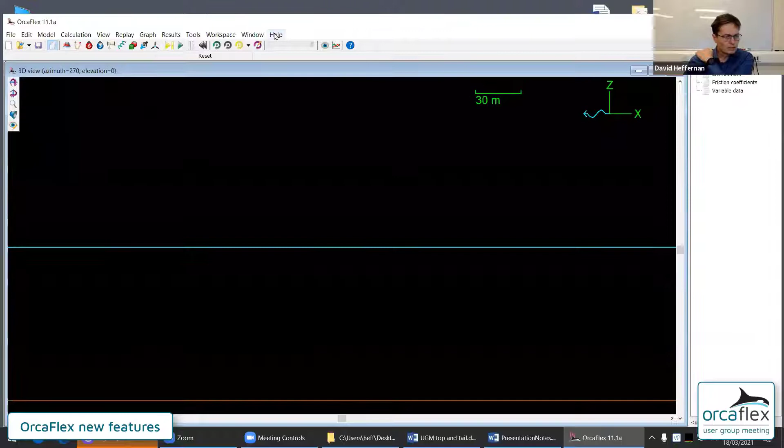As I always do, I point out the documentation can be found for each release under Help, What's New, and we have the lists of new features with hyperlinks through to the details of the change. So I'll just be giving a high-level overview. If you need to learn more about any of these new features, come to the documentation, go to What's New, and follow the appropriate link.

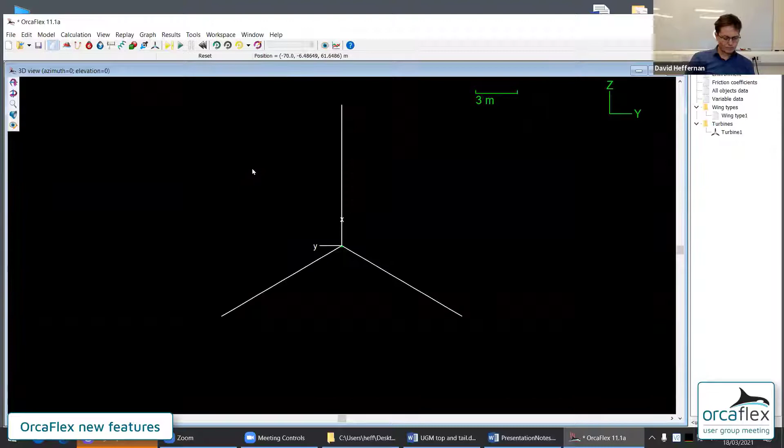So I'm going to be flitting through from one feature to the next. To begin with, I'm going to talk about turbines. I've just dropped one on the form, and I'm going to show node axes, and I'm just going to put a few more segments in there.

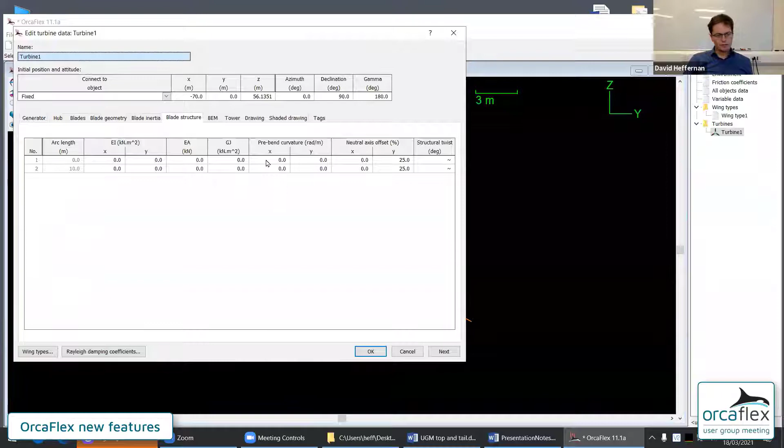So the change that I want to talk about is prebend, which is something that you can now specify for a turbine, on the structure page of the data form, and I will keep doing this - I'll try and get both my turbine and the data form on screen. I can put in a value.

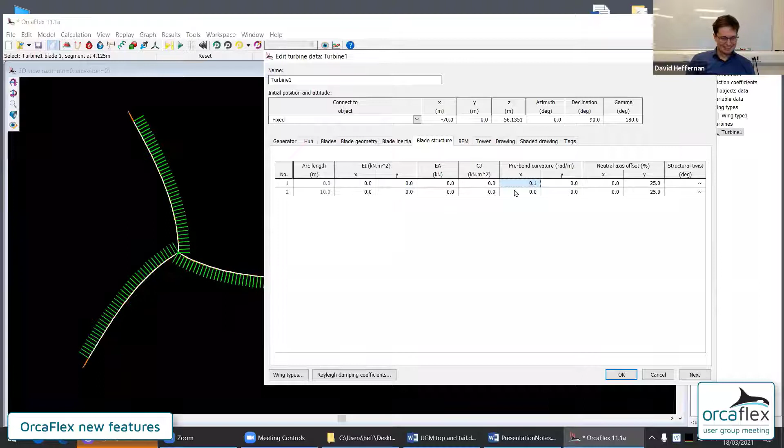I can do really crazy things like that, which, realistically, it's going to be smaller, isn't it? And curvature in prebend curvature in X and Y - I've obviously grossly over-specified these curvature values just to demonstrate it. So on the face of it, it's a very, very simple feature.

The data is certainly simple to enter, even if it might sometimes be tricky to get hold of the actual numbers. It's a feature that matches something you can already do with OrcaFlex lines, which are very similar to turbine blades. But it's actually an important feature, even if it looks like quite a small change. The prebend can have a pretty significant impact on turbine response, so being able to model it now is important.

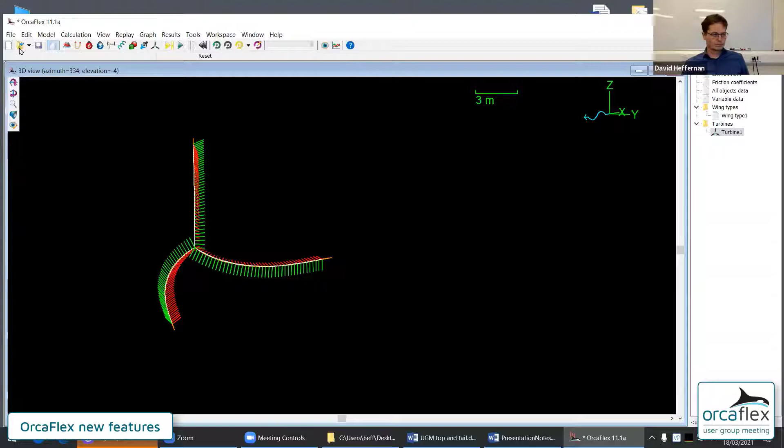Let me have a look now at a pre-prepared example.

And I'm going to show range graphs for turbine blades. Now, range graphs are an existing feature. Previously, you could only have them for lines, but turbine blades are very similar to lines. And a range graph plots how a variable varies across the arc length of a line, or now in the case of a turbine blade, a blade.

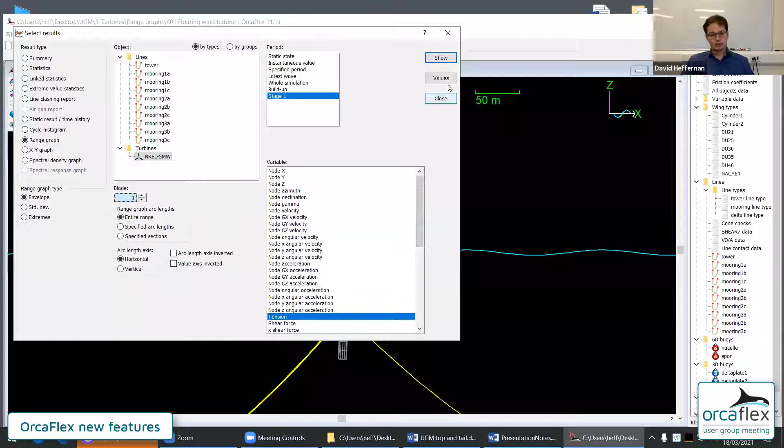So I've selected the turbine here. I'm going to look at results for tension and bend moment for blade number 1. You can specify whichever blade you want, and obviously you just get the results that are defined for blades rather than the whole turbine itself. And it takes a little while to extract the results, and here we have range graphs for turbine blades.

Now, previously this information was available. You could get time histories and do min and max at a particular arc length, but what you couldn't do is this nice plotting of the whole thing across the whole blade.

And the final thing to mention about turbines, we've done a bit of work on our examples. We added a new turbine example which is available on our website. And this includes a model of the NREL 15 megawatt reference turbine, particularly notable because it uses the NREL reference open source controller ROSCO. That example had a fixed foundation, a fixed bottom,

but we are in the process of slightly reorganizing our examples. So the fixed platform will be changed from the 15 megawatt to a 10 megawatt, and we'll add a new example with a floating platform for the 15 megawatt turbine. We think that's maybe a little bit more representative and a little bit more useful. So keep an eye out for that coming to our website fairly soon.

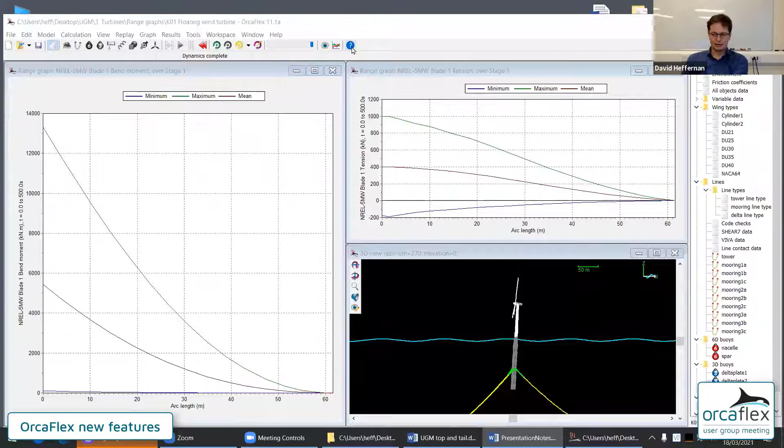And you can get the turbine controller examples from our website if you search for that phrase, OrcaFlex turbine controller examples, and I'm sure you'll be able to find that. But you can actually even pull them out of the help file. They're actually embedded in the help file. So if I go to a guide to using Python external functions, I click on that and I get to download a zip file with all these examples in, in case you didn't know where to find it.

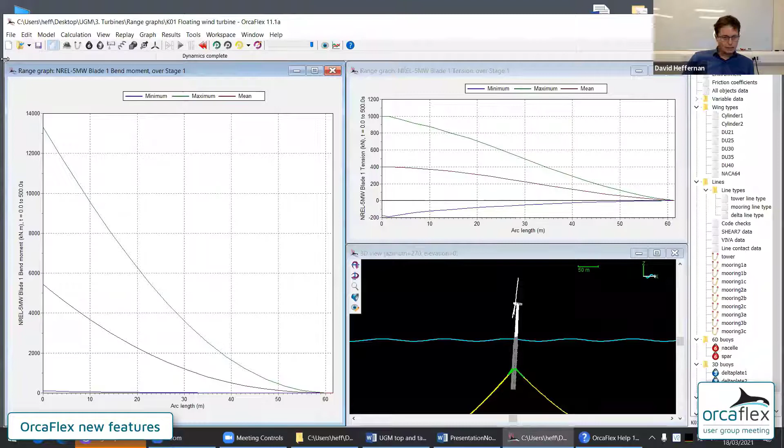Okay, I'm now going to leave turbines behind and talk about lines. They've not had that many changes because lines are a pretty mature object in OrcaFlex. I'm going to look at bending stiffness, and bending stiffness has a variety of ways in which it can be specified. It can be specified as a linear value, or using the variable data option, I'm not going to put any values in here, but you can define it as a non-linear function, a bend moment against curvature. That non-linear function can be elastic or hysteretic. And you can even define bend stiffness as being specified by an external function.

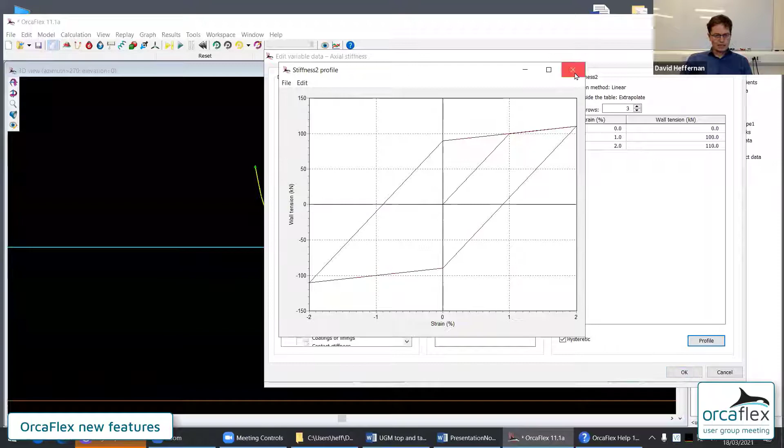For axial stiffness and for torsional stiffness, previously you had similar options, but you only had linear or non-linear elastic. Well, now both of them can specify the stiffness as an external function, so that's new. And additionally, if you're specifying it with a non-linear table, you can opt for that table to be interpreted in a hysteretic way. Select hysteretic, and we're gonna model it using our classic hysteresis model. I won't demonstrate it now, but that is also available for torsional stiffness.

The other change that we have relates to contact diameter. If you notice now, there's both outer and inner diameter. Previously, there was just one contact diameter, and it was the outer contact diameter. If you leave these values at tilde, they pick up the values from the diameter value specified here, but you can override them if you want to use a different diameter for contact purposes.

Most of the contact models are contact at the outer surface, but for line contact, it is possible to have contact at the inner surface of a line. So because that's available, we had some users for whom it would be beneficial to be able to specify the inner contact diameter being different from the diameter specified here.

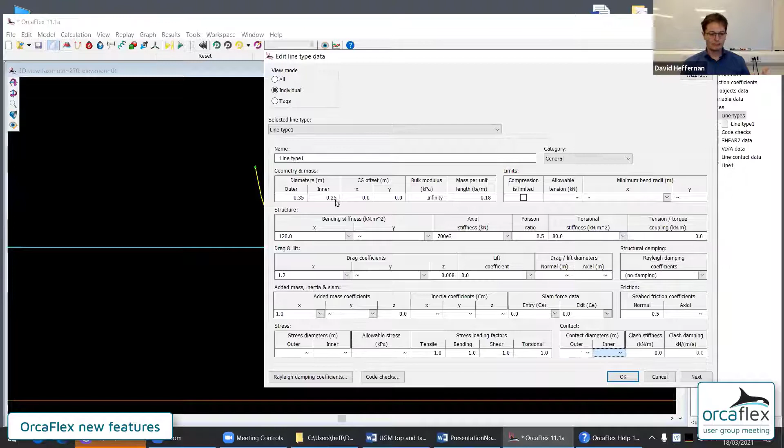We have added a couple of new result variables for lines. I'll just point them out in the documentation. You can find out the definitions by looking yourself. Sidewall pressure and total mean axial strain. And the final thing I want to mention is, I'm going to go back to OrcaFlex 11.0 for this.

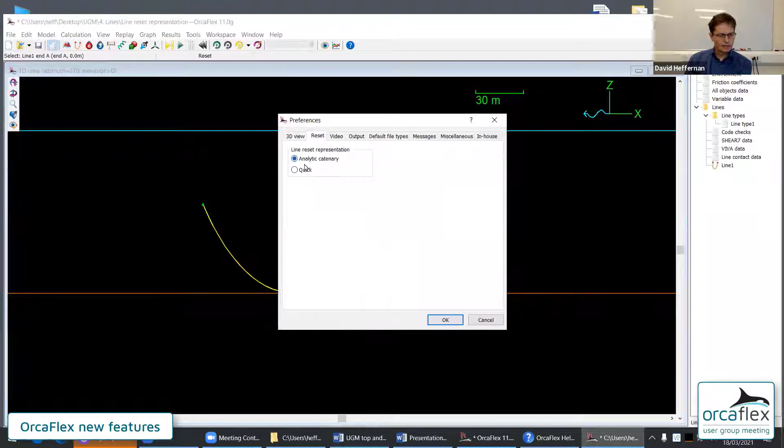Yeah. The last few releases, it's been possible to have the line reset representation accounting for the seabed using the analytic catenary solver in OrcaFlex. And in 11.0, there were two ways of working with this. You could either define a user preference, so that would allow different users to have a different preference, whether using the analytic catenary representation or whether they use the quick

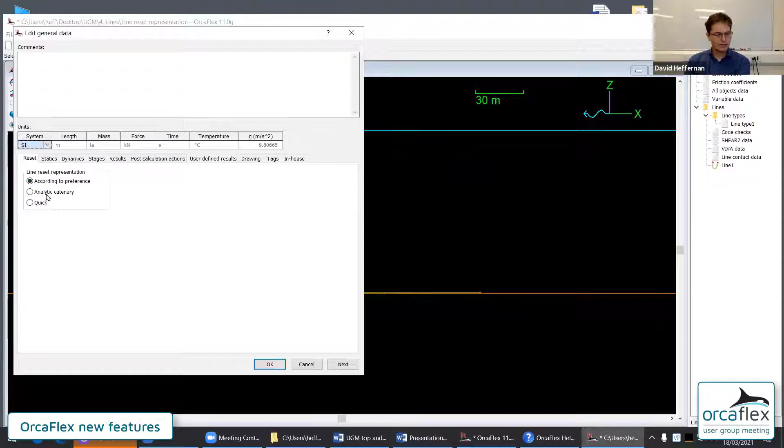representation, or as opposed to a per user setting, there is a per model setting that's built into the data file where you can choose to say this data file will always use quick or will always use analytic catenary. Alternatively, the default was let the user decide on an overall preference and apply that preference to any model which is set according to preference.

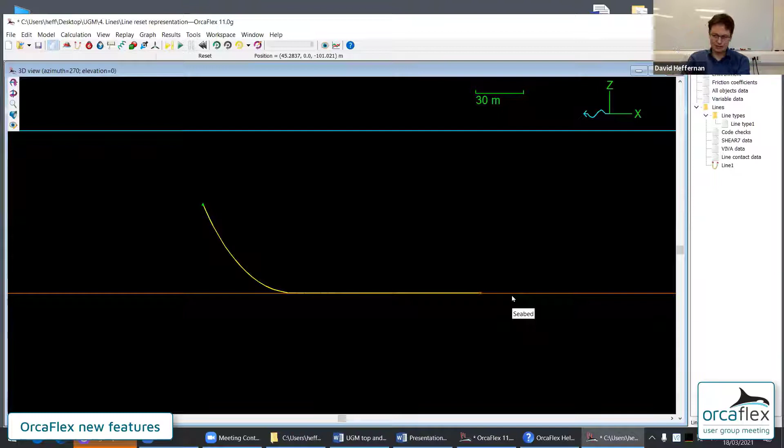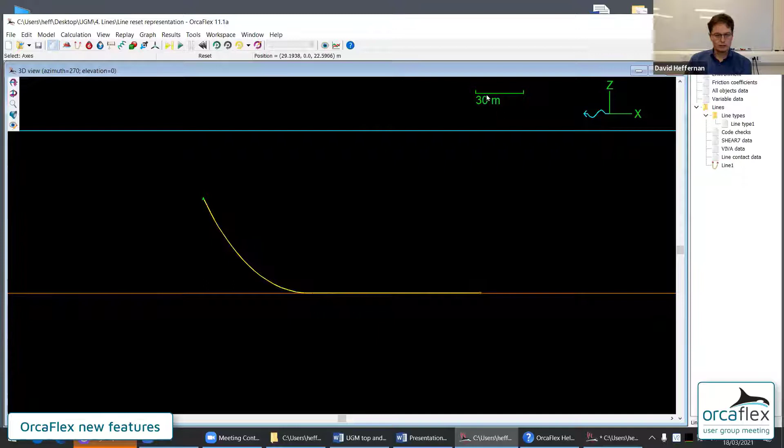Well, I won't explain why, because I tried to do that this morning and got myself tied in knots because it's quite convoluted. But for various reasons, we've decided to remove that preference. So now the setting, whether you represent the line in reset with analytic catenary or quick, cannot be controlled by user preference. It is always determined by the model data.

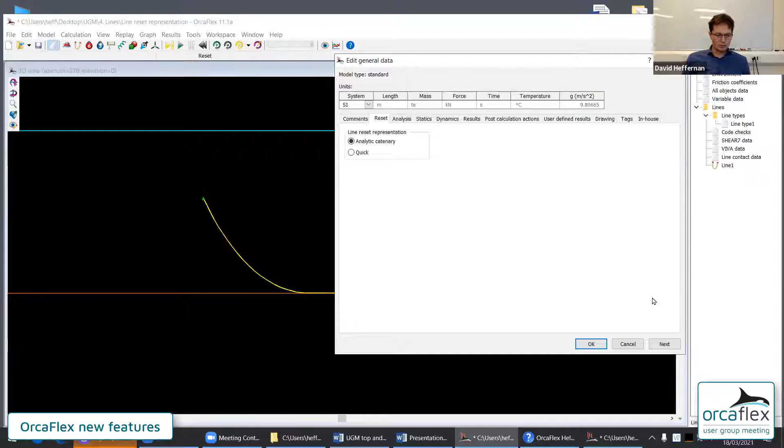Okay, so it's a slight loss of convenience. I'm not even sure how often that convenience was used, because I suspect most people just have it on analytic catenary the whole time and don't think about it. So I suspect nobody will really notice. But if any of you were reliant on that, I'm afraid the preference has gone. The functionality is still available, but the user preference mode has gone. But there were very good reasons for doing that.

Right. We'll look at vessels now. A couple of changes there. Again, they're quite a mature object, so there's not a whole lot that's different. So, frequency dependent added mass and damping. In previous versions, you specify the added mass and damping matrices at a range of periods or a range of frequencies depending on what convention you're using, and those were finite periods or frequencies.

But for the convolution integral, the program needs an infinite frequency added mass. Previously the program would estimate that using the data provided for finite frequencies. But diffraction packages are capable of calculating the infinite frequency added mass matrix, and OrcaWave does that, and a number of others do. Once OrcaWave was producing and outputting it, we felt it was a bit odd that we weren't using it in OrcaFlex. So you can now use that in OrcaFlex.

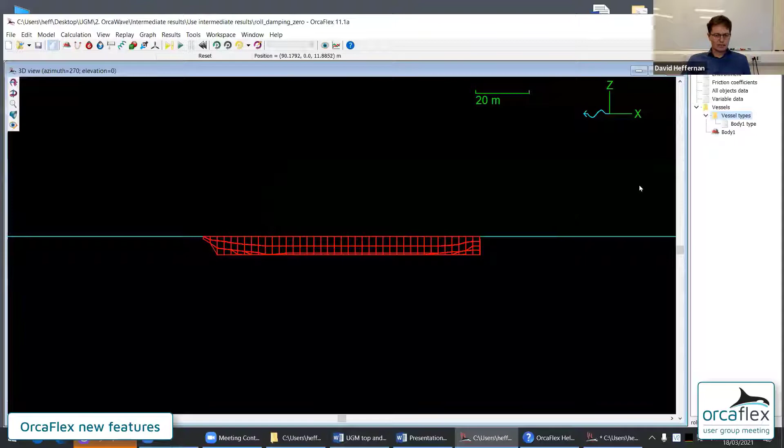It's pretty simple to see how it works. I'm going to import a model from yesterday's OrcaWave presentation, importing that OrcaWave results file into OrcaFlex itself. I've got hydrodynamic data calculated by OrcaWave, and we can see that we have an infinite frequency added mass matrix defined. And we will import that from other sources. If you're importing from WAMIT and the WAMIT output file has it, then it will come in to OrcaFlex. Likewise for generic text files.

At the moment, we can't import it from AQWA because, so far as we know, AQWA doesn't export that information. We may be wrong, but whenever we've asked for collaboration with AQWA on our import facility, we don't get any response. So users that are also AQWA users may be able to tell us that you can get this information out of an AQWA file. If that's the case, let us know and we'll see if we can bring it in. But otherwise, there are other programs, and certainly OrcaWave, which a lot of people are starting to use now, produces it, and we will import it.

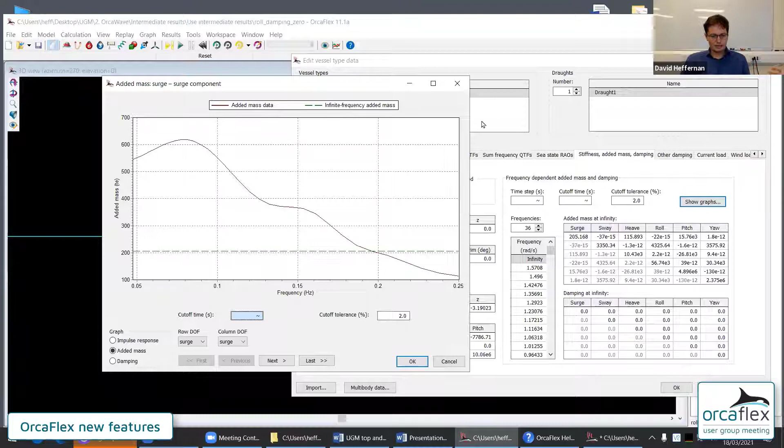And I also wanted to note that the previous method actually looks pretty reasonable. It depends on your data, but I'm going to show the graph of added mass here. The green dotted line is the infinite frequency. This has come directly from the data, so that value 205 corresponds to that value there. If I delete this, and you might have such data yourself, even in OrcaFlex 11.1, OrcaFlex will revert to estimating the infinite frequency value from the finite data.

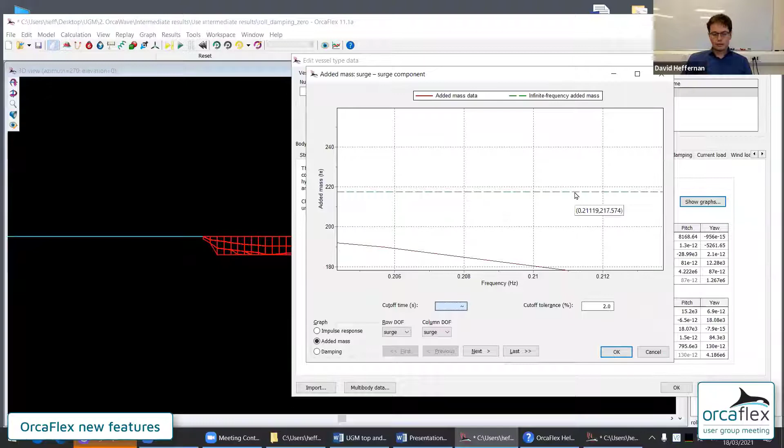And if I look at what that is, zoom in. Previously, the calculated value was 205. The estimated value is 217. It's a little bit out, but it's the same ballpark. So I don't think what was happening previously was too far off the mark, but I think it's an improvement to use the accurate calculated value if it's available.

The other change with vessels relates to the calculation options. This data is new in 11.1: the options of how you calculate hydrostatic stiffness angles. It is only used when the calculation mode is filtering. It's not a data item that you get offered when you're using QTF modifications.

But when you're using filtering, then you have to choose between orientation and subtraction. Subtraction was how the program did it previously. And what this controls is how OrcaFlex calculates the roll and pitch angles used as input to the hydrostatic stiffness load. And so long as the vessel type's datum trim angle is 0, then these two methods are equivalent. It doesn't matter which you choose.

But when that's not the case, when you have non-zero datum trim angle, then there is a difference. And for significantly non-zero datum trim, we believe that the orientation method is preferable. So, for any future models that you build, you should use orientation, which is the default. And we've retained subtraction just so that you can compare like for like and recapture previous calculations.

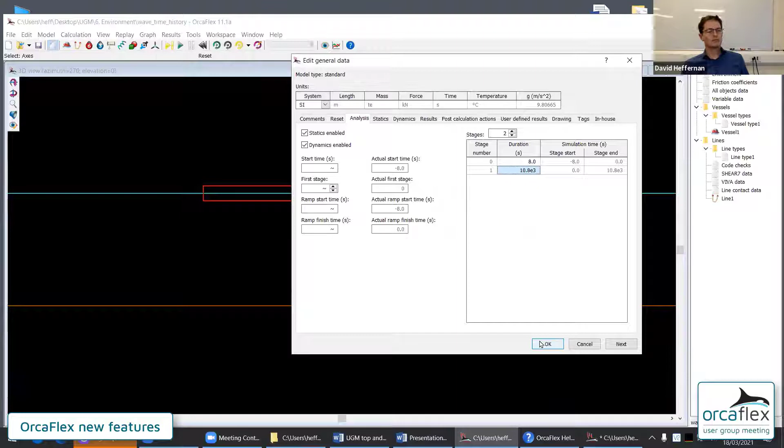And I'm going to look at a prepared example. I have a simulation duration of 10,800 seconds, which is 3 hours. And my wave data, it's a time history, with a 0.1 second time interval. It's all pretty routine stuff. If I run this and wait to see the first estimate of the time taken to run a 3-hour simulation, it's a pretty simple line. There's only 100 or so elements. It's not a big model, but it's going to take over a day to run this analysis.

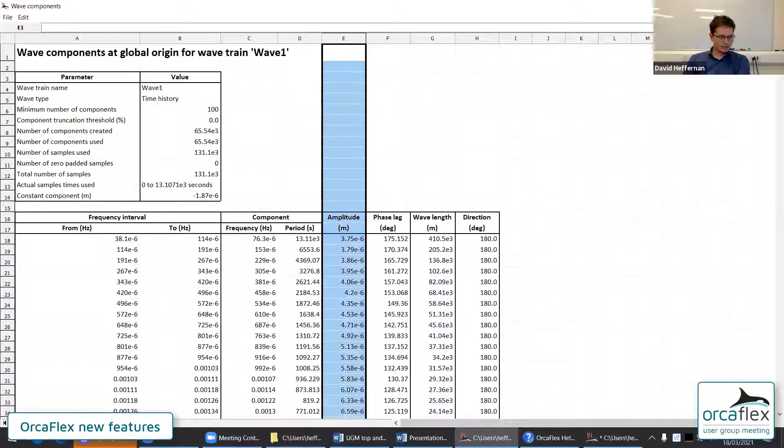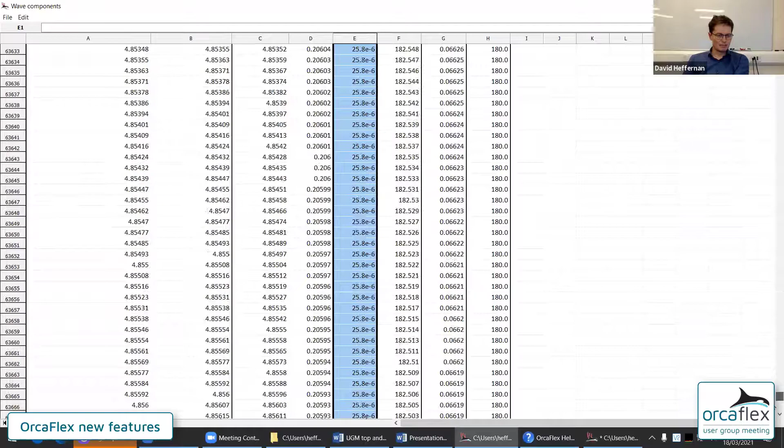And the reason is, if I come back into the environment form and look at the wave components, I see I'm dealing with 65,000 wave components. It's a lot of wave components. If I select the amplitude data, it's low to begin with. Fairly rapidly, as frequency increases, we get some significant values. And then again, the absolute lion's share of this table has very, very small amplitude. You can often neglect the majority of the components without losing any really important information. All those high frequency components are there to ensure that the wave goes through each data point exactly, but to get the overall sense of the wave, you don't need them.

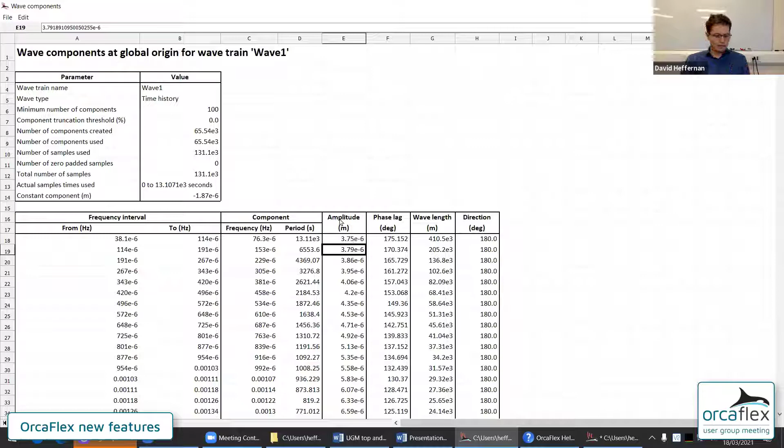So we've been suggesting you find some way of truncating, taking the first so many lowest frequency wave components, dropping them in as user specified components, and that's it. Gives a significant speed up. That's fiddly to do if you've got lots of different time histories. It can be awkward. So what you can now do in 11.1 is get the program to do that process of truncating the high frequency components for you, and you can control it by specifying a truncation threshold.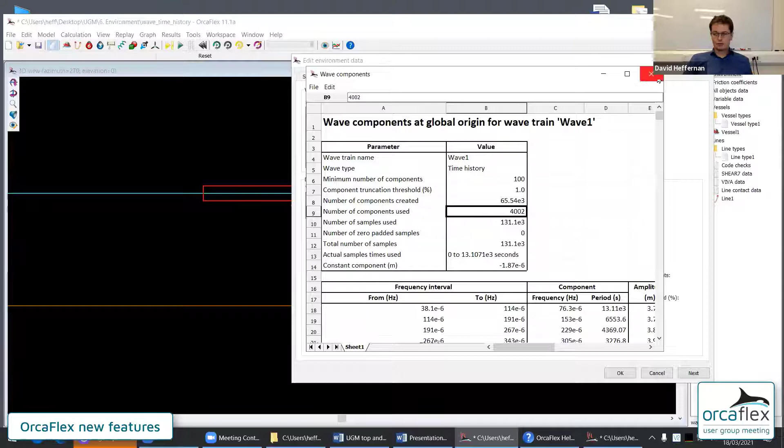We will remove high frequency components up to a specified percentage of the overall spectral energy. So I want to remove high frequency components, but no more than 1% of the overall spectral energy. Now if I look at the wave components again, the total number before truncation was still 65,000, but now I've only got 4,000 left. So I've got more than 10 times fewer wave components. And if I run the simulation, it should be more than 10 times faster. So what was formerly over 24 hours is now under 2 hours.

And that feature, in combination with wave calculation optimization methods, perhaps a kinematics cutoff depth for a deep water case, and some of the various options you have here, combine those, and you can get some significant speed ups. Now it's also worth pointing out you don't want to take too much off, because if you take too much off, you're going to lose accuracy. So you should do sensitivity studies to determine whether or not it's okay to take 1% off.

If I change that to 0.1%, then I'll find that whereas before I had 4,000, now I've got 6,500 components. Probably isn't going to be that much difference in the runtime. Maybe you're more comfortable with 0.1. Maybe you're prepared to bite a bit more off. You need to work out yourself where to draw the line in this.

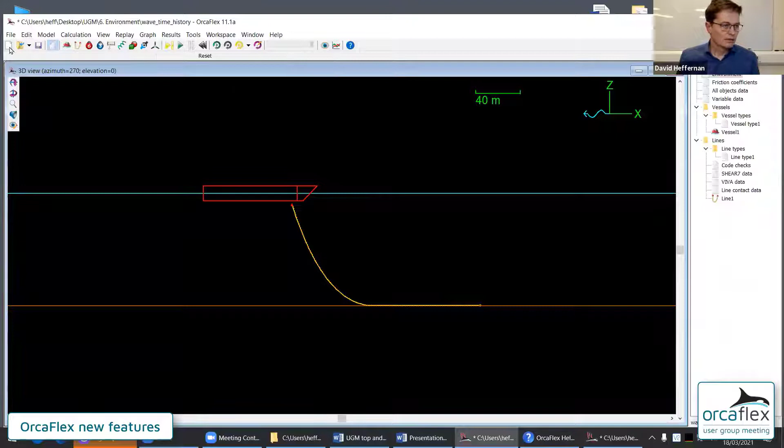Now we're going to move on and talk about objects with zero mass, which is a new thing in 11.1. So objects with mass, vessels, buoys, lines, turbines. In previous versions, you could not set the mass to zero. OrcaFlex would object. But now in 11.1 you can. And this tends to be useful when you're connecting objects together.

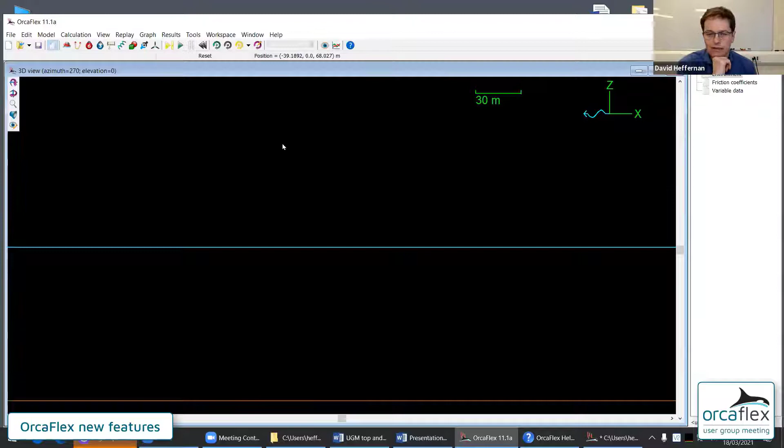You might have a series of 6D buoys all connected together, and maybe you have one parent object, which is maybe your frame of reference object, you might think of it. But you connect a bunch of other objects as children to it, and you give them all the mass, the loading, and so on. And maybe you want to have no properties on the frame reference object.

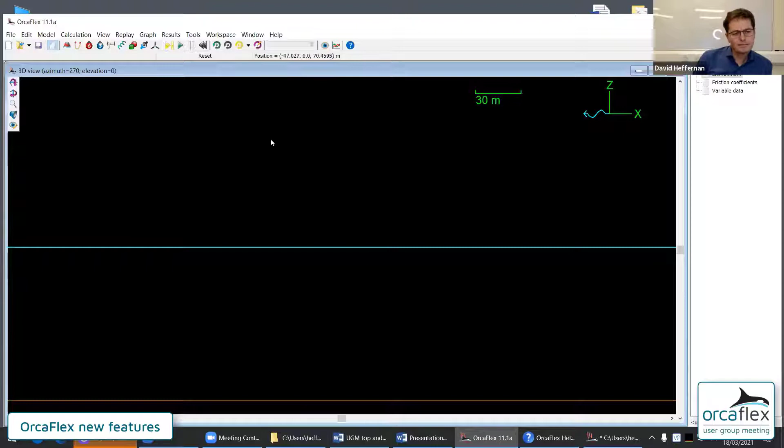And previously, if you were doing that, you'd use this give buoy negligible properties option. And when we did this, lots of data is all zeroized. And previously, the mass would be set to I think 1e-3. I think I'm remembering that correctly, but it wouldn't ever be set to 0 because the program would not allow you to perform an analysis with that. And it doesn't let you perform an analysis with that because the equation of motion is singular if the mass has gone to 0.

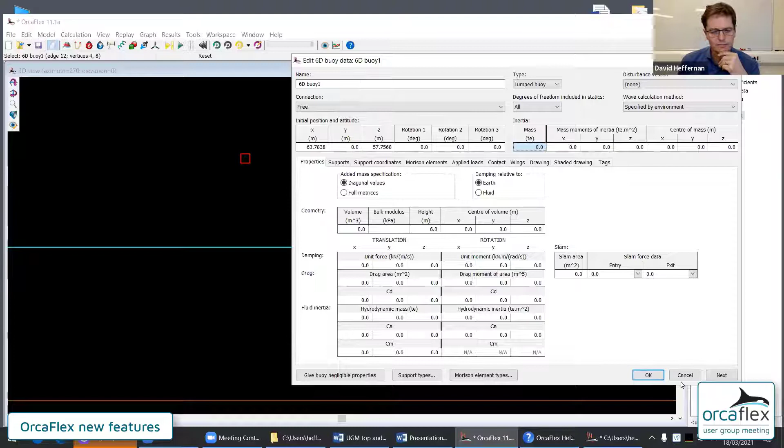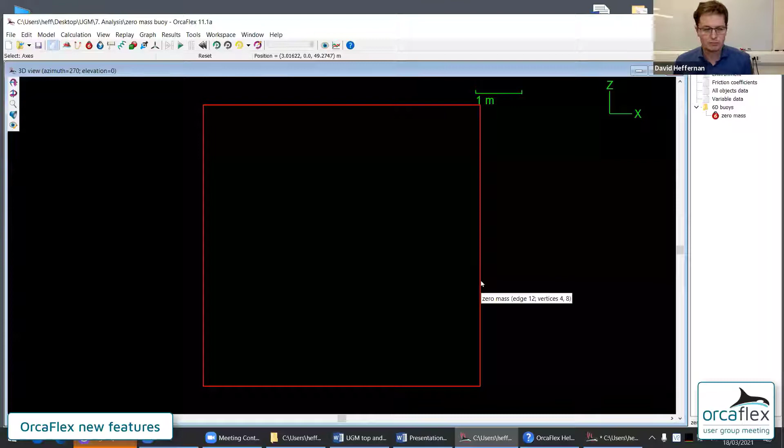But now we're allowing you to set the mass to 0, and I'm going to show what happens if I run this case. I've got no statics, so I'm just going to jump straight into dynamics because I don't want to mess around with trying to find a static equilibrium for this buoy. I just want this buoy to drop under gravity, and I've got 0 mass for it, and I'm expecting this to fail because of exactly what I said. The equations of motion are singular. And that's exactly what happens. The simulation is immediately unstable because we've got 0 mass.

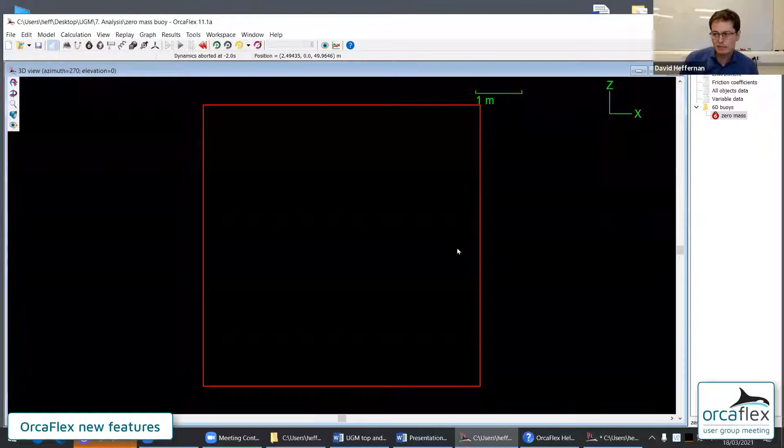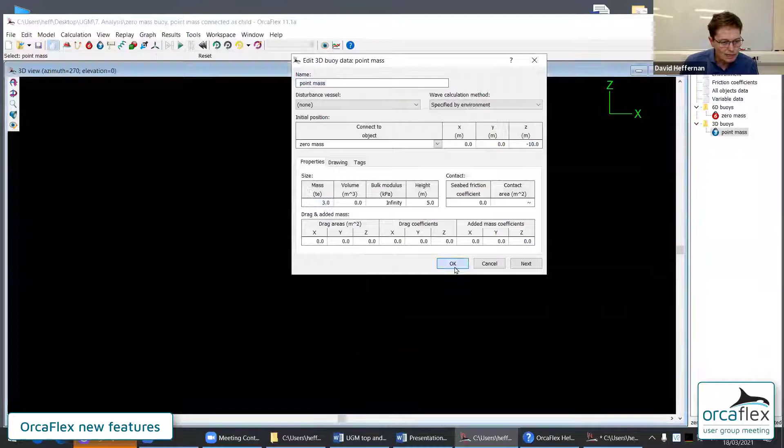But in reality, the scenario I talked about, you would have objects connected to this one. So now my other example has all the same data, the same buoy, but now this 3D buoy is connected as a child of the 6D buoy. This one, the 3D buoy, has some mass, so the compound object now actually has mass. So that's how I've been able to run this. Dynamics all works perfectly because the compound structure actually does have mass, even though one of the objects in it doesn't have mass.

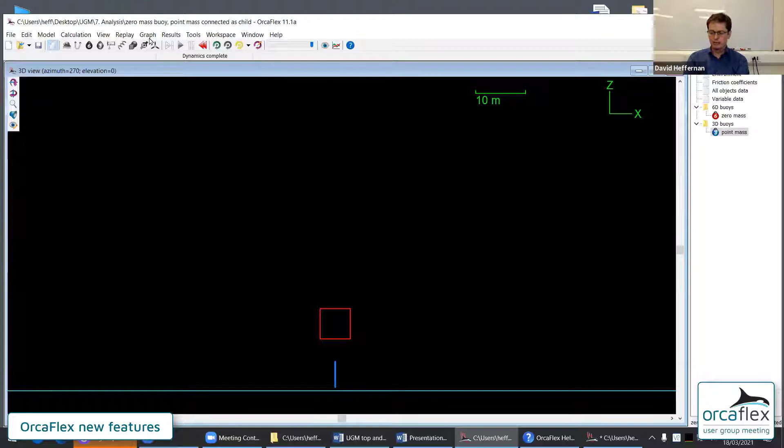So it's not a huge change. I mean, you could always work around it by putting in a very small value, but we felt it was worth allowing you to put in exactly 0, which makes it clearer what you're doing. Otherwise, you might be justifying, why is that value 1e-3? What does that mean? Why have you chosen that value rather than anything else?

Let's bring up the help file again, and I will mention some new results for vessels. When you're using the frequency domain solver, you can now get results for first order wave load, second order wave drift, and added mass and damping.

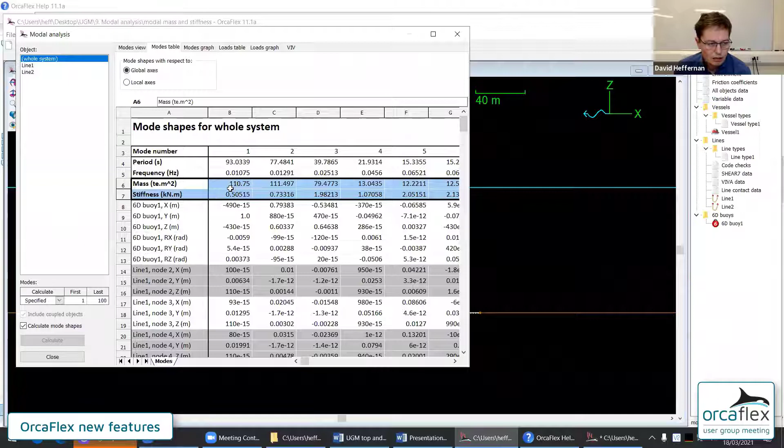And let me also flip over to modal analysis. A very small change. I put the model that I prepared into static state. I'm going to perform a modal analysis with mode shapes, and so long as I have mode shapes reported with respect to global axes, we get this new information. Each mode's modal mass and modal stiffness is reported in the table.

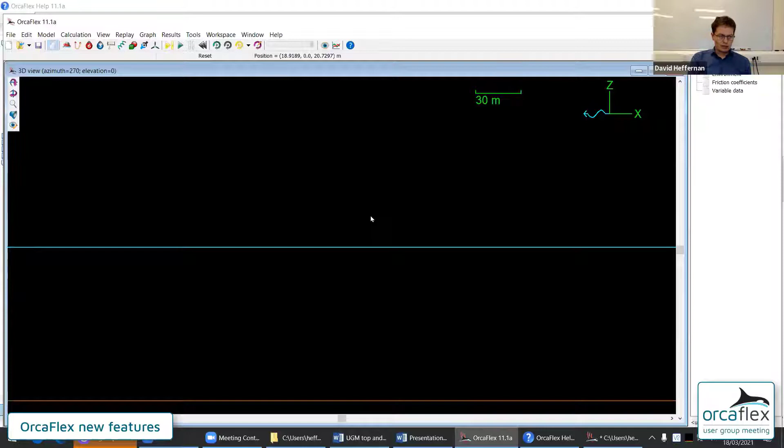Okay, now I'm going to move away from the calculation side of things and start talking about drawing. And as you know, when we introduced OrcaWave in 11.0, we introduced the code, the ability to import panel mesh, which is needed for diffraction.

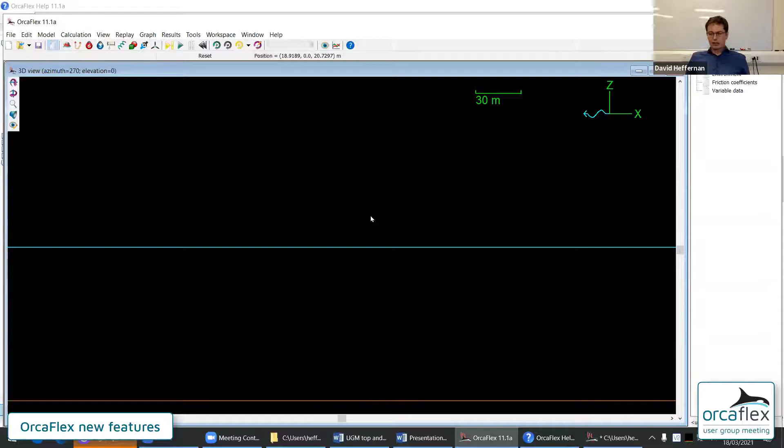For OrcaFlex, we've used that same code to allow you to import panel mesh data to use for drawing data in OrcaFlex. So there's no calculation based on panel meshes in OrcaFlex itself. That all happens over in OrcaWave. But it can be very useful to import those panel meshes into your typically OrcaFlex vessels. And I'm going to demonstrate this in 11.0 to show how things were, and then show how they've been changed in 11.1.

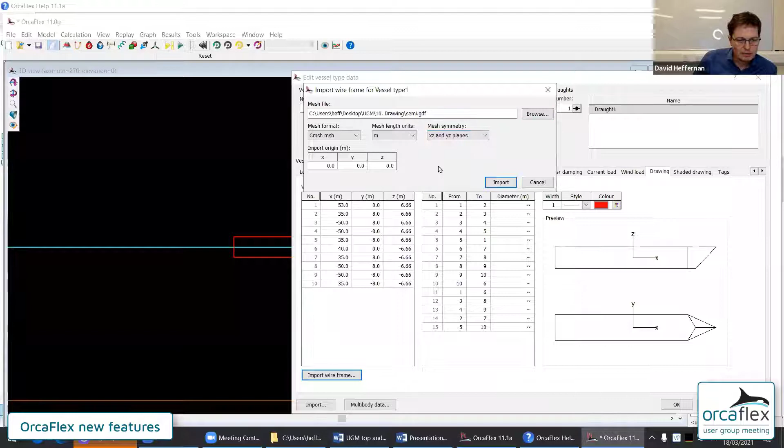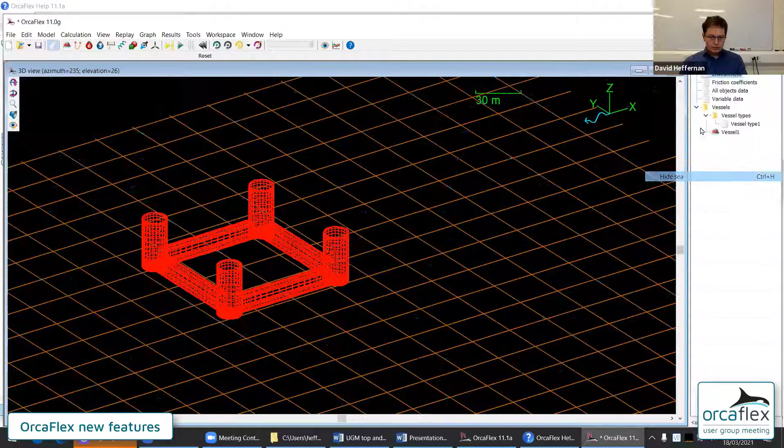So in 11.0, if I come over to the drawing page and I go to import, I need to change this, let's see if I can find the file. This is the WAMIT example semi-sub, which I know has 2 planes of symmetry. And I need to specify that it's a GDF file. And if I import that, then yippee, I get my semi-sub, and everything's all wonderful. Let me just hide these things.

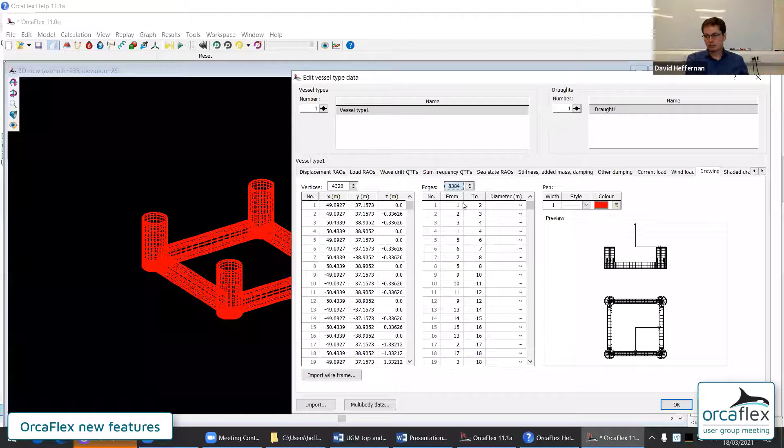And I will also note I've imported 4,000 vertices and 8,000 edges, and in fact, although there's symmetry in the panel mesh, I've not retained the symmetry. We've kind of exploded the symmetry at the point at which we did the import.

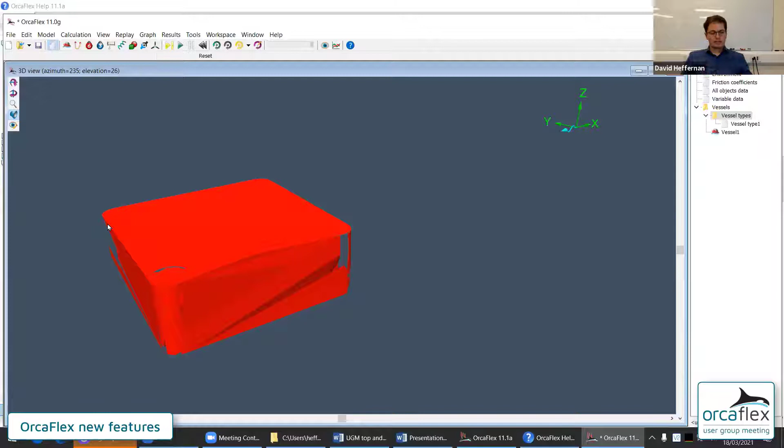If I switch this to shaded graphics mode, then the result isn't so great, because what happens here is we've not specified a shaded graphics model, and so OrcaFlex takes the wireframe data and finds convex hulls for all the connected vertices. All these vertices are connected together, so we end up getting the convex hull, or the smallest convex shape that contains these vertices, and that's really just not what you wanted.

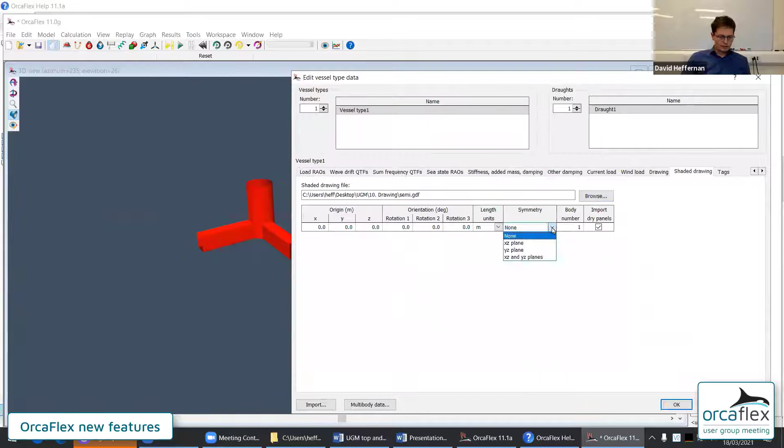So in 11.0 you had a separate step. You had to go to the shaded drawing file, and you could go and then select the same file, specify my symmetry options, and there you go. So you can do it in 11.0, but it took a few extra steps.

And the thing that we realized was that for the shaded drawing, what you want is panels. You actually want triangles. And these panel mesh files contain either triangles or quads. Well, quads can easily be split into triangles. So why are we importing panels, quads or triangles, converting them into edges and then doing the convex hull when we could just retain the panels and use them directly? So that's what we've done in 11.1.

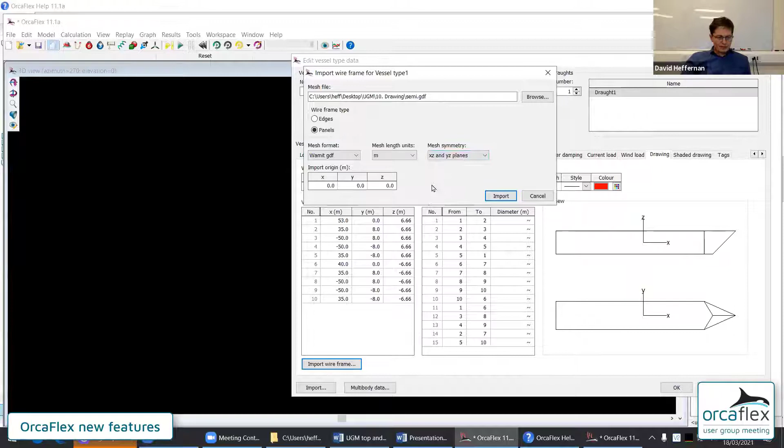Now, if I do the same set of operations, I'm going to have to go and do the same hunting around for my files. Now when I come to import, I've got this new option. Do I want to import as edges or panels? Now, almost always you should import as panels. We've only retained edges in case you want to import and then share the file with someone who has an older version of OrcaFlex that doesn't understand panels.

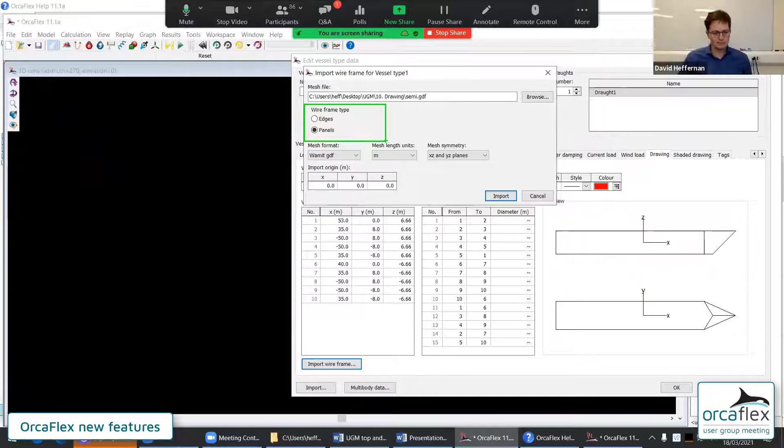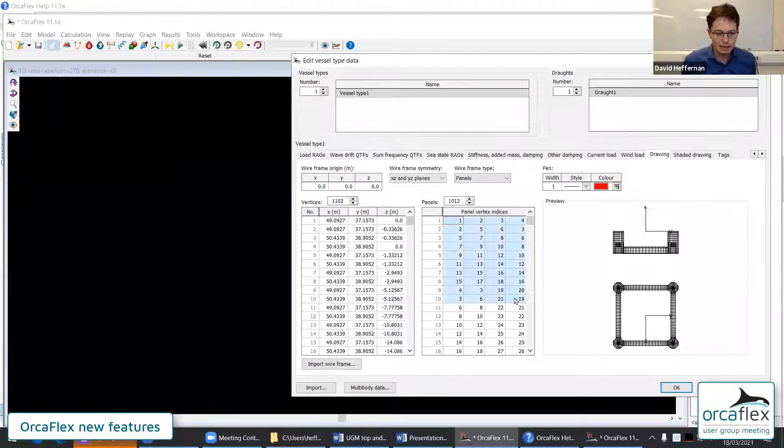So if I import as panels, then I can see I'm actually getting less, smaller data. Previously I had 4,000 vertices, now I've got 1,000. That's because we've retained the symmetry information, and we've also imported as panels and retained the panel information. It looks exactly the same in the wireframe, of course, but if I now switch to the shaded, then immediately we have the drawing that we want.

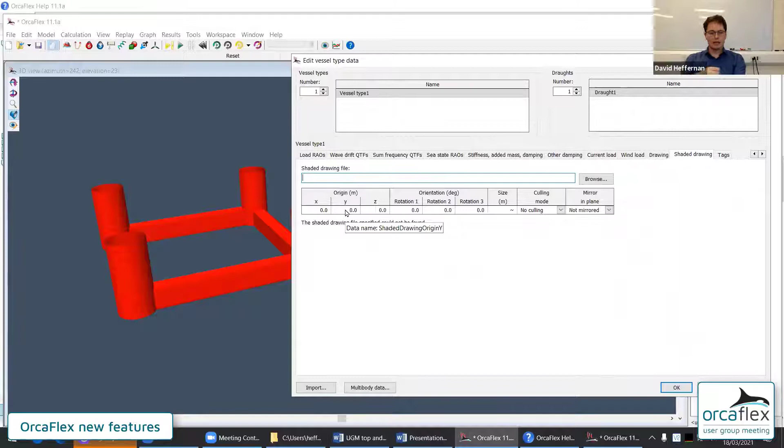We did not need to set any data here in the shaded drawing. We didn't need to repeat ourselves. And now, in fact, this file is completely self-contained in terms of drawing. I get the nice panel drawing, and all the data is inside the OrcaFlex model. And because we've retained the symmetry information, we're able to store less data. There's less storage required because we've got fewer vertices. In order for symmetry to make any sense, the planes of symmetry may not line up exactly with the body origin, so we also have wireframe origin to support that symmetry.

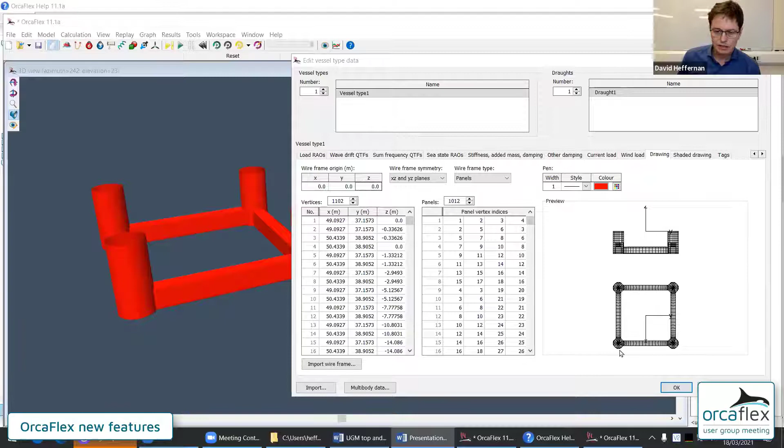Now, the other change relating to drawing is for the convex hull algorithm. So if you've got a wireframe that doesn't come from a panel mesh and you don't have panel data, we will still use convex hull to generate the drawing for shaded. And one thing that we found when users were able to import panel meshes is that they had wireframe data that was a lot bigger than we were used to.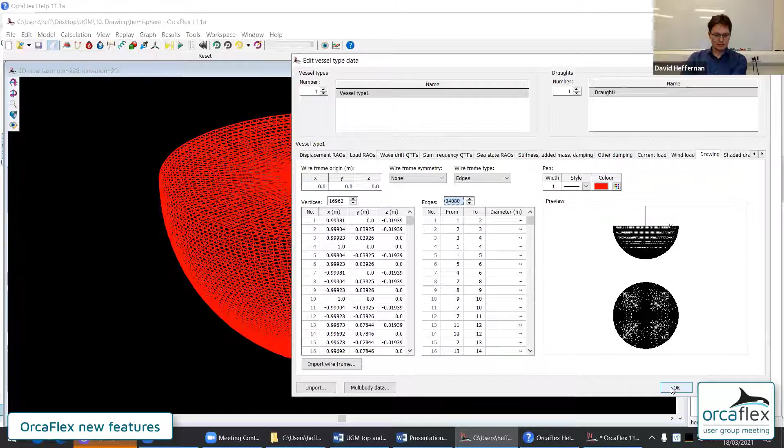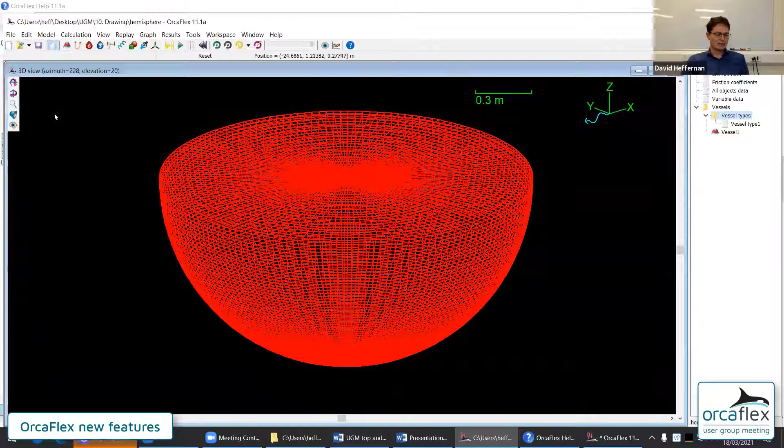And this is an example where we've got 34,000 edges, which is a lot of edges, 17,000 vertices, and that's the thing that counts for the convex hull. Our previous code, which was a homegrown implementation of the convex hull algorithm, was not as efficient as it could be, and if in 11.0 I were to click on this button, which I'm not going to do because it's fairly disastrous, the program sits for minutes trying to work this out, literally 5 or 10 minutes. Click on that here, it's instant. That's because we've replaced that convex hull code with a more optimized version.

And moving on to my final topic, which is embedded scripts. OrcaFlex has the ability to use embedded Python scripts for external functions, post-calculation actions, user-defined results, and curvilinear constraints. It's been able to do that for some time.

Curvilinear constraints, the Python code you use is already embedded in the OrcaFlex data. But for the other three options, external functions, post-calc actions, user-defined results, the Python code is held in an external file. Sometimes this can be a little inconvenient because you have to move the files around together, and if you forget to do that, you have a sim file without the associated script. It can fail to load.

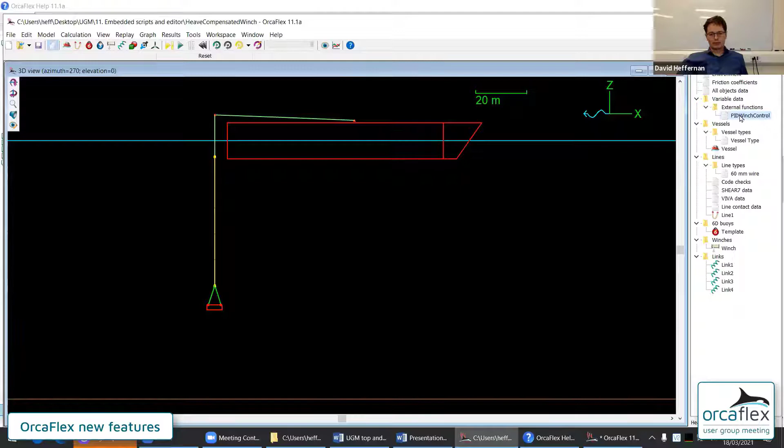So what you can now do - I've loaded up our classic heave compensated winch example, which uses a PID winch control, a PID controller implemented as a Python external function. This now uses, in this new data here, an embedded script.

The old way of doing it is still available. You can specify it as an external file. But if you use an embedded script, then the text, the actual script, is contained in this rather tiny window. I don't expect anyone to type in and do keyhole editing in this. That would just be ridiculous.

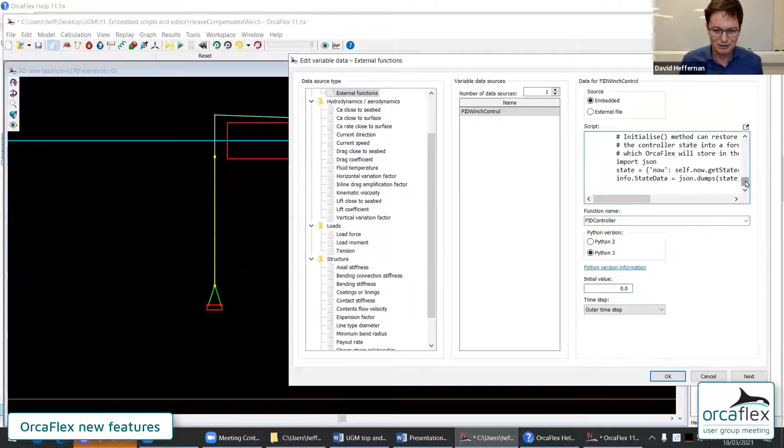If you want to do the editing in OrcaFlex, see this button here, which will open up a pop-out editor. We have a very, very basic editor embedded in OrcaFlex now. You can show special characters and line numbers, and you can do code folding, and there's find and replace. But it's very basic, and before anyone starts asking for more advanced features like regular expression searches or macros or anything like that, we're not going to implement an advanced text editor in OrcaFlex.

There's a lot of really good text editors around - a huge number, and everyone will have their own preference. So if you want to do more advanced stuff, do that in an external text editor. Really, this is just so you can see it easily with a bit of syntax highlighting, and maybe make the odd small change.

Now, the other places where we have embedded Python, post-calc actions, the same is true, embedded or external. When you're embedded, you get the pop-out editor, and very similar for user-defined results, embedded or external.

Now, embedded has some advantages, but still external is useful. There's times when maybe you have many models, multiple load cases, say, and they all use the same script. It can be repetitive to embed it in every single model. Maybe you want to make a change just to that one script - you'd have to go and apply that change to all of those models. We sometimes share code between different external functions in one file, in one script.

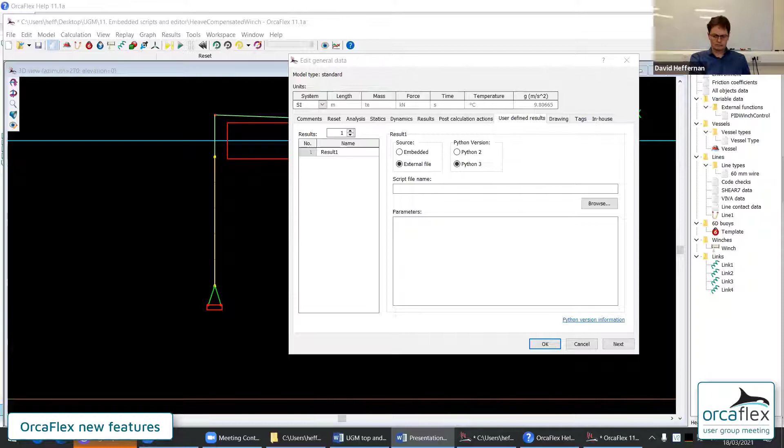The canonical example of that is the turbine controller, our Python turbine controller, which implements in one script a torque controller and a pitch controller. If you use embedded for that, then you end up with two copies of the same script, which is kind of wasteful. An external script allows you to use revision control. So there's pros and cons to each way.

It's up to you to decide which you prefer. Okay, and that's the end of the presentation that we have prepared. I'm going to stop my screen share in a minute and close up and deal with any questions.